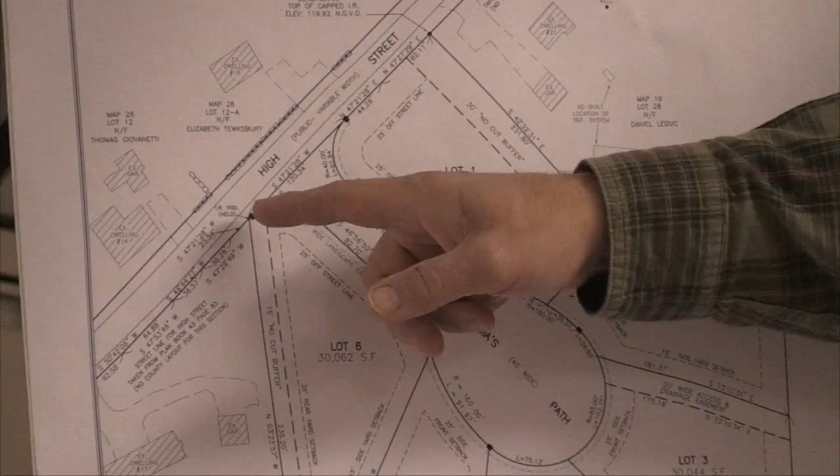So we reconfigured the lots. Basically what we did is we moved the corner of the intersection of the roadway. The intersection originally had ended at the intersection of the two lot lines to the abutter, so at the existing perimeter. We just shifted that over 2.73 feet as shown on the plan, and then slightly angled, shifted the road so that it was, again, as close to what was originally proposed. And everything else stayed the same as far as the lots.

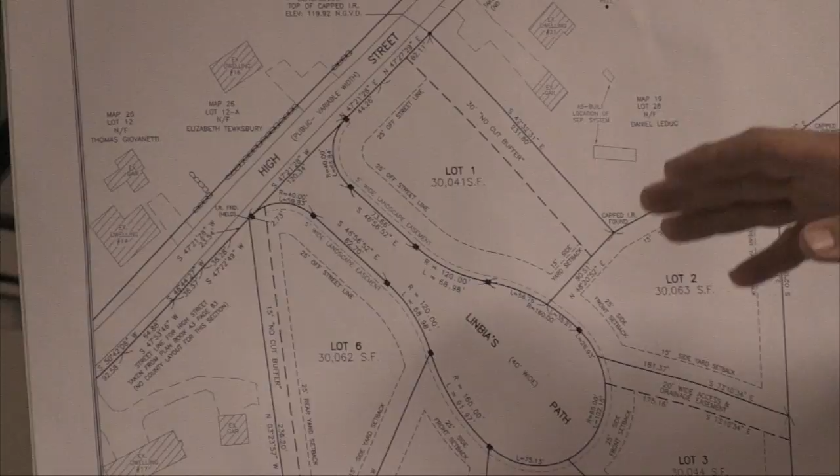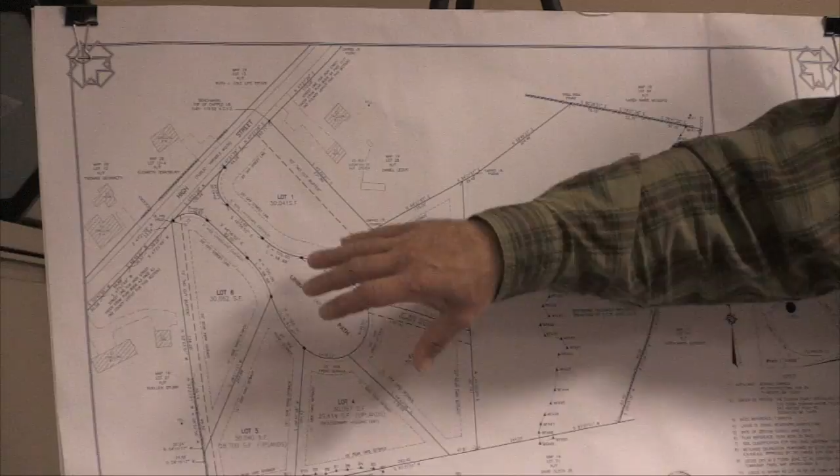The lots are changed slightly. Some of the interior lines separating the lots had shifted a little bit. They're all 30,000 square feet. We didn't change anything on the open space. We kept the line that was originally shown as separating the developed portion of the subdivision and the open space the same. So we just basically reshifted some of the interior lot lines so that we can make sure that we had the 30,000 square feet, which is required in a conservation subdivision.

So after we had our original meeting with the board to discuss the changes, we went down and staked out where the realignment, the edge of the pavement was. He's actually gone and put his base coat down. We located again, just to be on the safe side, where the catch basins and drain manholes and outlet structures and things like that fell, just to make sure that everything was still the same, and everything seems to be fitting now within this new layout of the road.

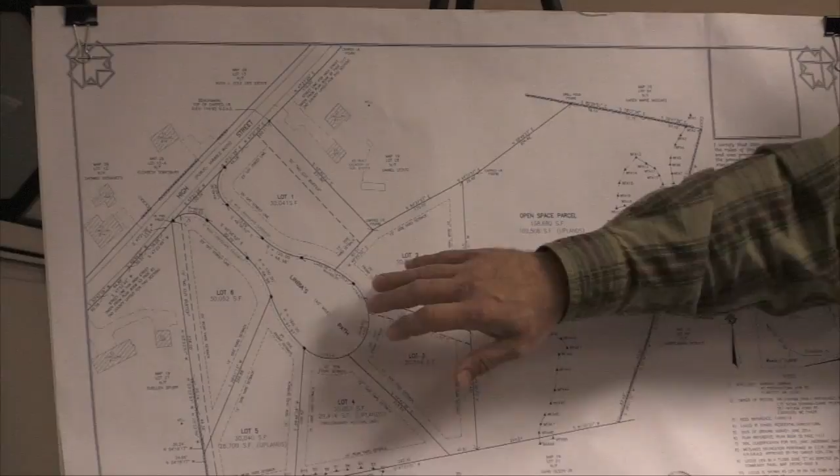So we haven't added any lots. We haven't really changed much of the area of the lots. It's pretty much the same, just a few things shifted to make it easier for him. Any questions by any of the board members?

I know before we had talked about that road, that originally when you come out, it was going to face a house. Does this affect that at all? Like the headlights, they're not going to go right. It shifted, actually, the angle of it shifted this way. It was the house that was directly across, which was more perpendicular with High Street. So it actually shifts a little bit westerly on the alignment. So it's not any closer to the house than it was before as far as the vision?

It shouldn't be. If it is, it's just so slightly; nothing really had changed that much. The centerline stakes that were out there, you really can't even notice the difference. What would have been the big problem if we had left it and not done anything, it would have been when they had come and installed the sidewalk. That's when we would have noticed that the sidewalk was outside of the layout around the cul-de-sac.

It probably would have been okay down in this area, but as soon as they started to make around this bend, that sidewalk would have been on the lots and not within the layout, so everything kind of got shifted so that wouldn't be a problem in the future. Okay, thank you. Anybody else have any questions?

Of course, my question is, the shift took place heading towards Kingston, not back up the other way, right? Exactly. Which way would that be? It would be heading north, northeast. Okay, so the shift is northeast, not towards an abutter? No. Right. It actually favors the abutter 2.73 feet. Right.

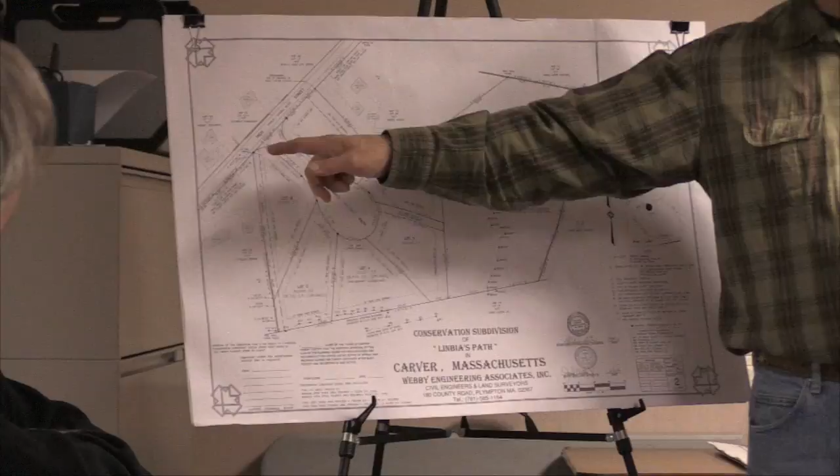To address his concerns, we had gone out and flagged the limit of clearing, and there was a flag at his lot corner, as he stated. The tree cutter did start in that location, figuring that was the limit of clearing, instead of where we had marked it 15 feet beyond, which is what he's referring to as a buffer zone. They did go into this area and I think cut down a couple trees, but somebody called our office and we went out there immediately and assessed where it was.

We reflagged the line for the tree cutter. It did look like there was some cutting that went within this 15-foot buffer at the top, but it didn't go much beyond maybe 50 feet from the intersection of High Street. It was mostly up in this area.

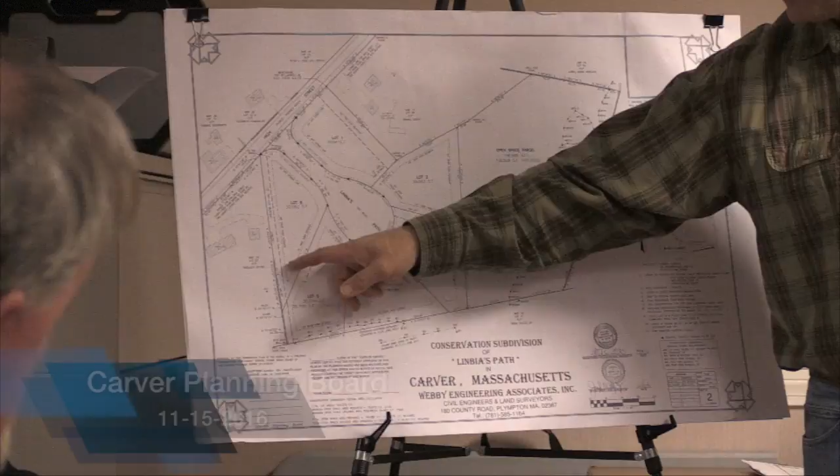The remainder of the line is kind of defined by an old stone wall, and then there were some stakes along the line, I think, that they had put in, and it didn't, to me, appear that they had cut anything that kind of served as screening between his property and where the construction was, except for this area, like I said.

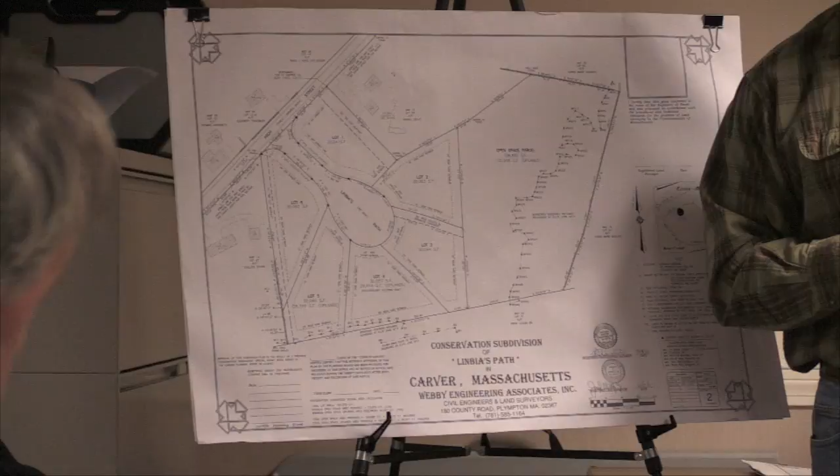So once it was brought to their attention, they stopped. There are some trees that they actually had intended to cut. They were marked, but they haven't cut those. They're going to leave those as they are. But he is right that they did get a little carried away up in this area here.

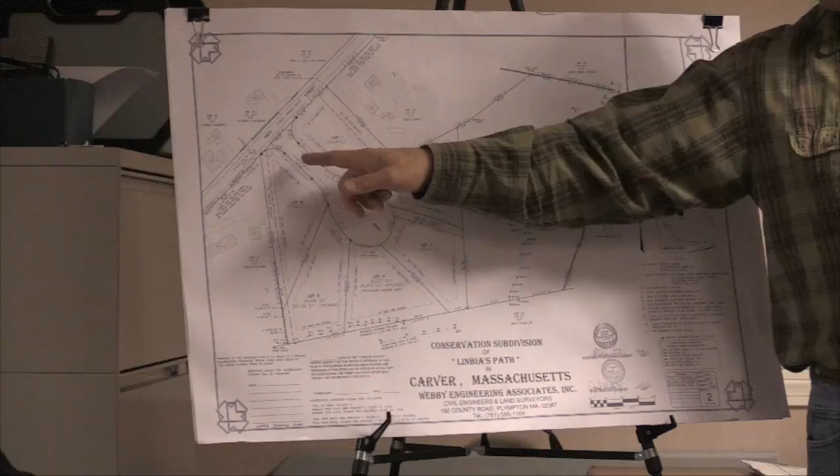As far as the grading of the road, we always knew that there would be that low spot that had to be elevated. As you came down the road, and this was something we came before the board to discuss, changing the profile, the layout of the road, we adjusted it so that it met more with the natural grade. We did have to fill in this low spot, but we always knew that had to come up,

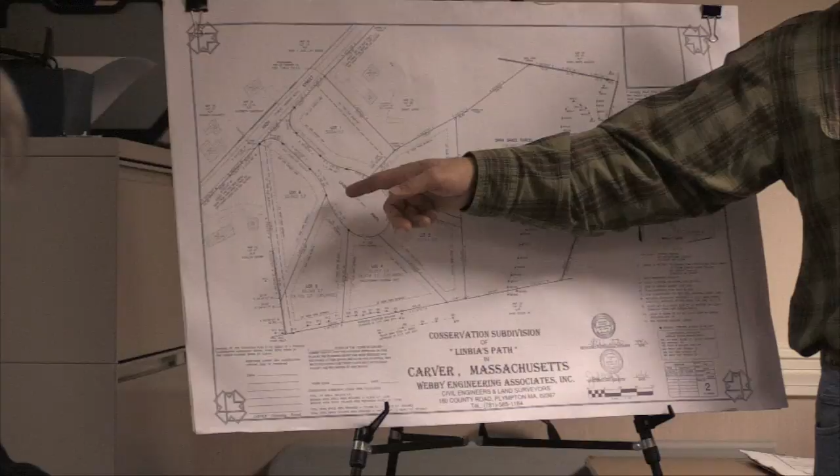and I don't know about 4 feet, but it's probably 3 or 4 feet, which, again, once they removed the top 2 feet of loam, which is typical, you can't construct a road on the existing grade. They had to remove a couple of feet, so it probably looks like it's more fill compared to the original grade. But the remainder of it matches pretty close to what the existing grade is when you come from here to here, and on this side here, it is in this area.

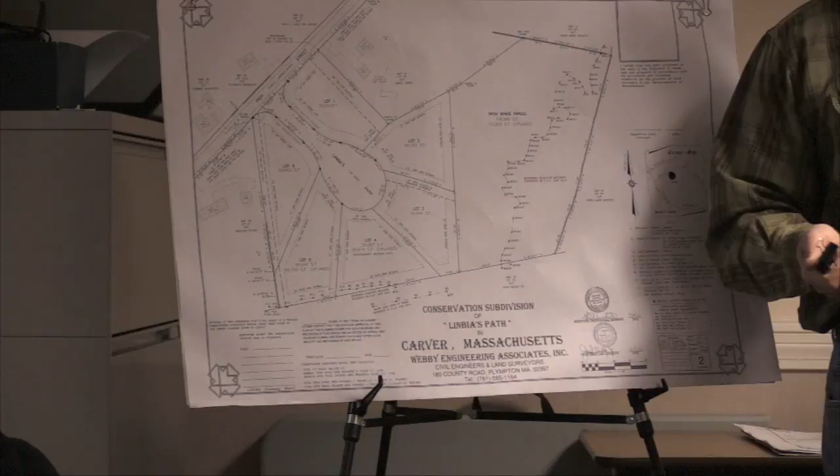But I've been out there after it's rained, and to me it doesn't look like there's any water that's coming off of the site, especially within the roadway. We get concerned about that, and every time we're working on a new development, when it rains, we go out there and check it out to see how things are working. And I shouldn't say I'm surprised, but I was surprised that, this is not for his concern, but any of the runoff within the cul-de-sac itself and the bioretention, everything is working very nicely within the catch basin area.

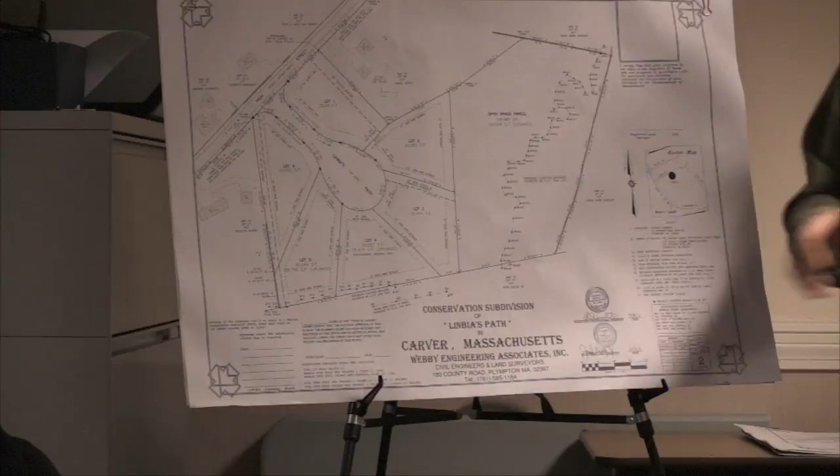As far as the neighboring properties, some of the grading that's happened in here is preparation for when they're going to start constructing some of the house lots. So he had some time to kind of prep the lots while he was waiting to go through this process. Again, he knew that there were some small hills that would have to get cut down, and that's basically what he's done.

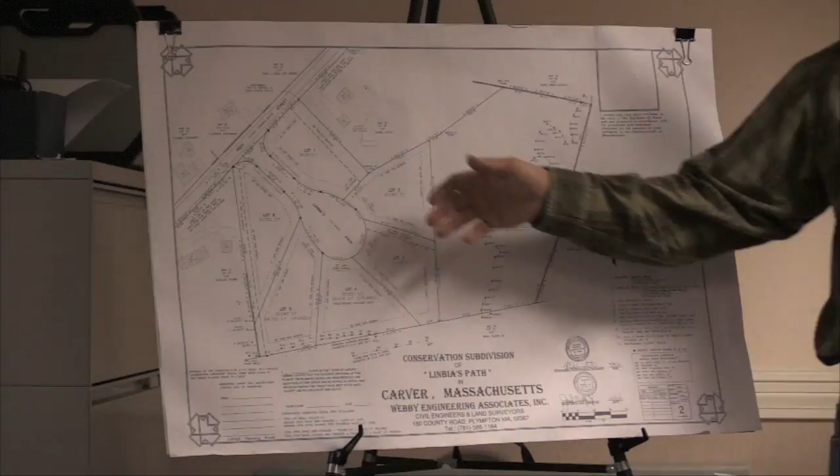But we've been out there on a few occasions and told him to remain as almost a natural berm along this property line. Last time I was out there, it seems to still maintain as a berm. So I don't have any concerns that there's water that's going to flow across this open area. None of the water is sheeting off of the roadway and then coming across this open area now.

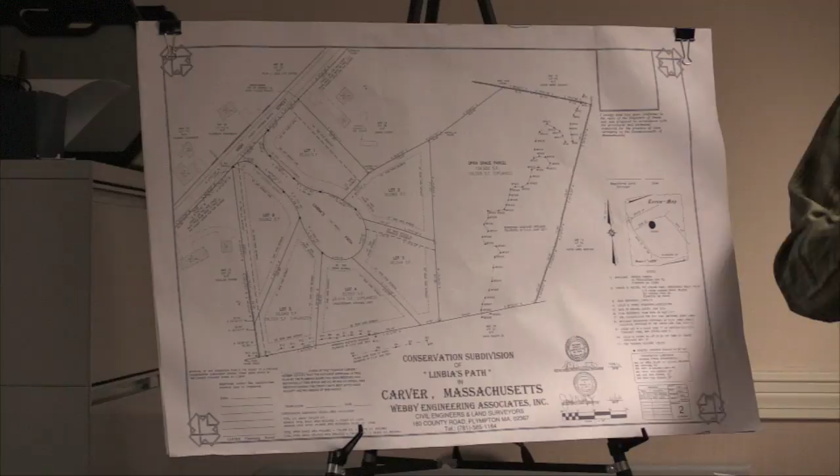And again, things are going to change, because once they construct the house here and the house here, these front yards are going to act as an additional berm. They're going to bring in some material and kind of slope everything towards the proposed roadway. So I know it looks different now because you're used to seeing it wooded in elevations. But it's definitely not done, and I don't think, now that the material has been stripped off the top, anything is flowing towards your property. Now, am I incorrect about that?

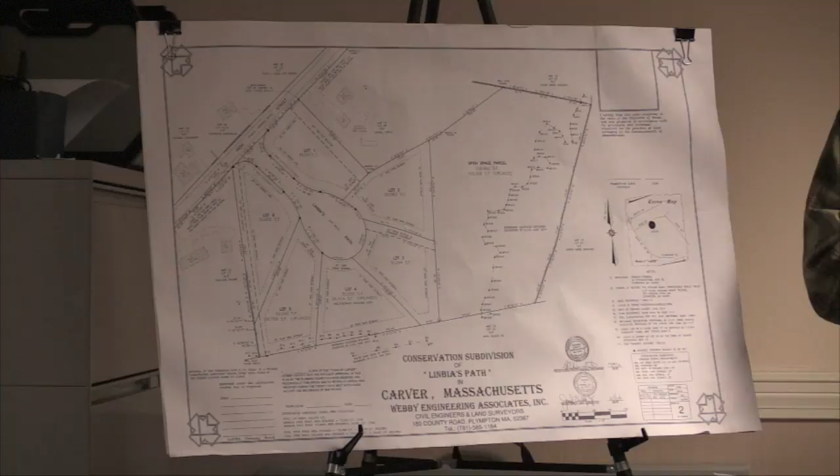No, I just had to ask again because I've noticed a lot of fill and a lot of stuff being brought in, and I know water runs off from higher points to lower points, and it seems like we are a low point next to that, which I brought up originally, which bothered me because I didn't want a river going through my backyard, because I never had a problem, even in the heaviest rains.

I never had an issue with anything rolling through the backyard out into the wetlands, which is lower at my property too, down at the end of my property. And we just worried that our little Eden there will be underwater at times, and we really love it there.

If the houses are placed where we have them proposed, we've got them kind of close to the street so that the people have decent backyards, then everything should grade away from your property into the roadway as was proposed. Okay. So that hasn't changed from the original plans. The grading's still the same. Okay. So everything should be, and that was what was approved at the beginning. So everything should be okay.

I just didn't know it was an issue, after knowing that my boundary marker was not known where it was, and I think the issue was the town has a metal pipe in the ground there doing their boundary off the road with a ribbon on it. In fact, I think they've just done it again. There's been some new ribbons put on a bunch of metal pipes headed towards my property. And I think originally they thought that might have been my marker, which was like 20 feet farther towards them than what it was.

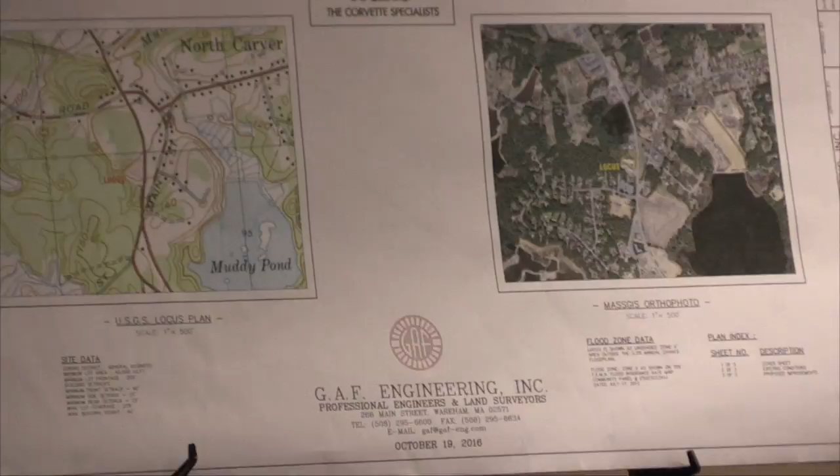Good evening. How you doing? Bill Madden from GAF Engineering here for Corvette Mike. Also with me is Mike Grande. He's Mike from Corvette Mike. I have some half sizes if you'd prefer to look at those as opposed to the large plan. Sure. I just brought them for convenience sake, if that's something that you'd like. I got one here. You got an extra? I'm good, I have mine.

Okay, essentially what we're doing is just repurposing the existing facility at 74 North Main Street. It was the previous pool business that is now out of business. And Corvette Mike has the property under agreement, and it's his intention to bring his business from Plymouth to Carver. It's right on Route 58. I think you're all familiar with the site.

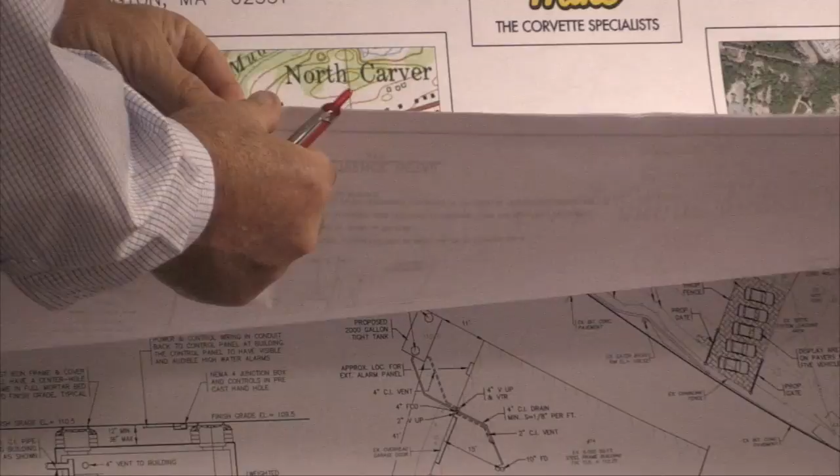The project's relatively straightforward. Really, it doesn't involve too much as far as site improvements go. The site is really perfect for what Mike intends to do here. The existing conditions plan that we prepared varies a little bit from the previous plan that was approved for the pool facility, and nothing of any great magnitude there. There's just some activities that took place, a couple of storage containers on the west side of the building.

There's a fuel tank, there's some air handling equipment here, and that's pretty much it. The pool display area was over here on this westerly side as well. And what we're looking to do is reuse some of that area. So effectively, there's no impervious area being added. There's no building expansion being proposed.

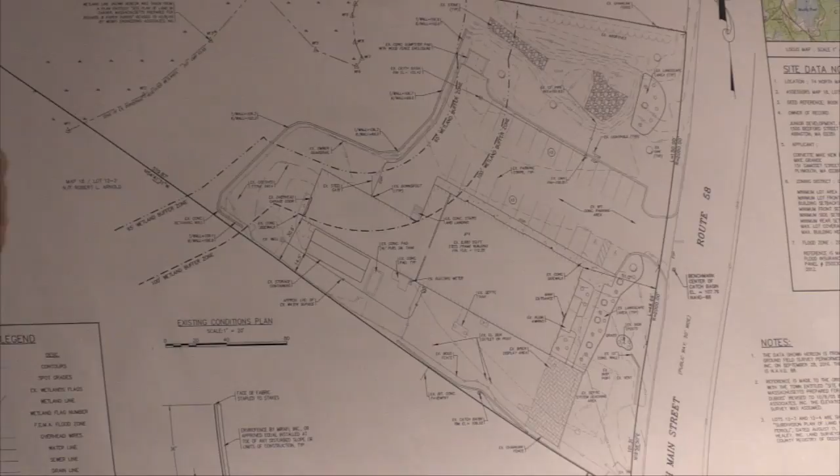There's nothing more than really utilizing the interior space for a showroom and a motor vehicle repair shop. The motor vehicle repair shop is really for the customers of the dealership, and it's by appointment only. It's not a drive-in, quick lube, oil change. It's very specific to by appointment only for the current customers, people that have purchased vehicles from Corvette Mike in the past. So that's really what's going on there.

So this plan here just essentially divides up the building. There's an existing wall on the inside of the building. I'm not certain what they originally considered the rear portion of the building. I think it might have been warehousing at one point and retail sales in the front part. So it was approximately 5,800 square feet of building in the front part. That would be the inside vehicle display area. There's approximately 3,100 feet in the rear. That would be the motor vehicle service area.

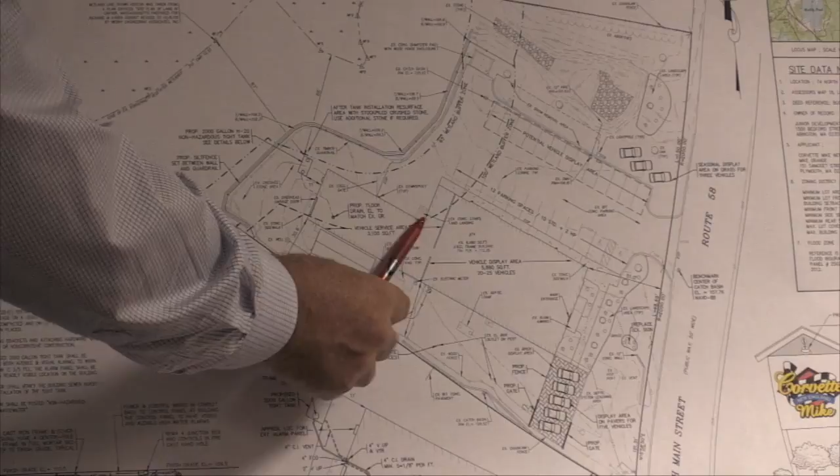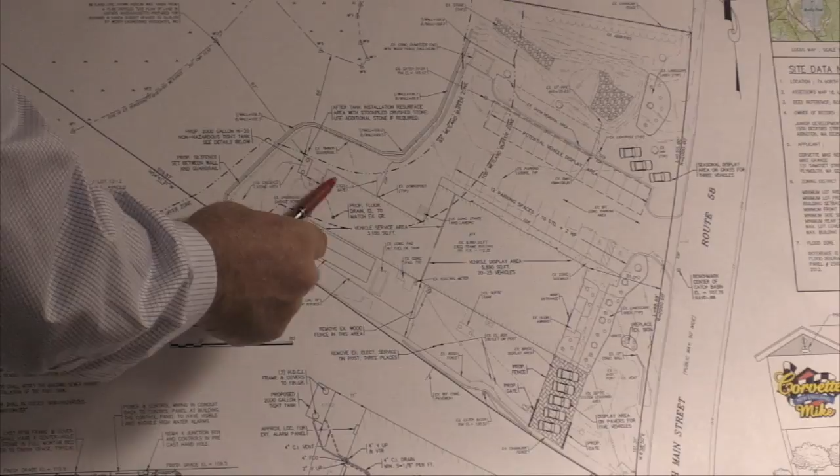There's an overhead garage door that on the original plans was indicated to be constructed and placed on this side of the building, but currently it's on the back side. So that works fairly well for the operation of the facility. The driveway and the curb cut on 58 is adequate for what we need for vehicular circulation on the site. And we can allow vehicles to come back here. There's a gate that exists here, paved parking down here, crushed stone up in this area, but it allows someone to come to the back to the service area to drop their vehicle off. You can drive it inside the building.

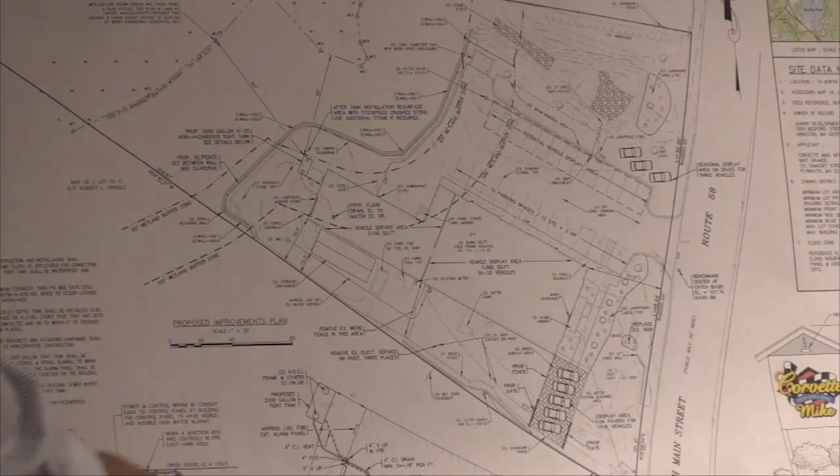One of the things that we recognized when we went to the site originally is that under today's plumbing code, any building with an overhead garage door requires a floor drain to be installed in it, in the event that a vehicle can find its way into a building. So in the absence of municipal sewerage, we have to place a non-hazardous waste holding tank in the back of the property. So we designed a small 10-inch floor drain in the front portion of the service bay, and then we indicate where we place our underground tank for the storage of any waste that finds its way into that floor drain. The details of the plumbing and the tank are shown on the plan.

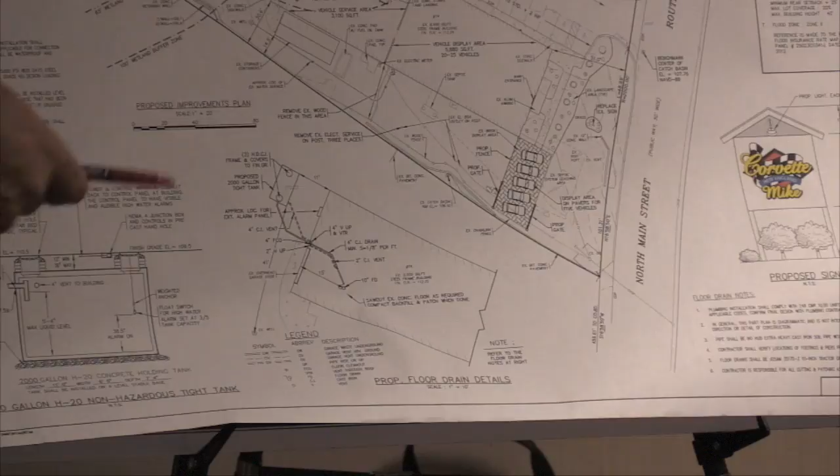This work does fall within the 100-foot buffer zone to the border of vegetated wetland that's out in the back, and we filed a request for determination with conservation. I had a discussion with Brooke, and she was fairly confident that that was the proper approach, given that we're separated from the wetland and the buffer zone by a stone retaining wall that's probably the better part of 4 feet high. There's really no opportunity for any adverse impact to the resource area or the buffer zone, just due to the nature of the site the way it's developed right now. So effectively, the only work going on the site is the installation of that holding tank, as it's required.

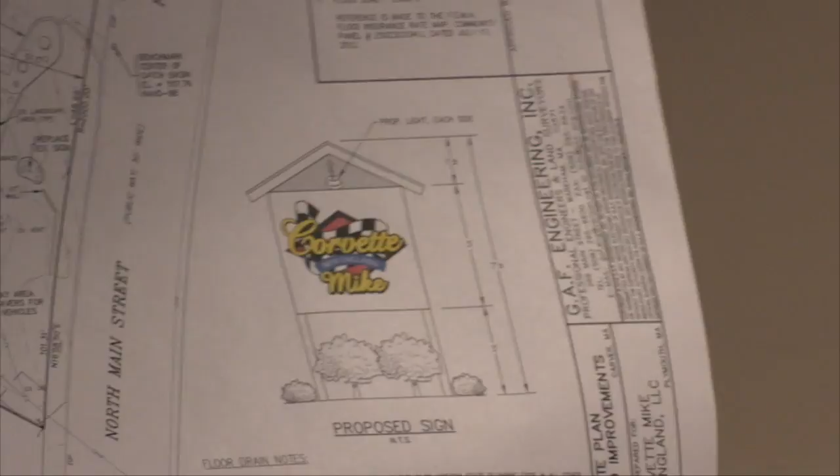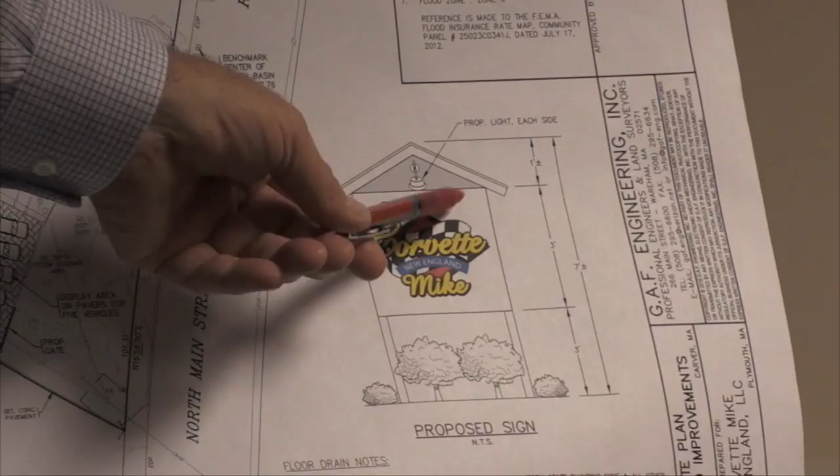We also show our project sign. There is an existing area centrally located to the front of the building where the sign was, and we've detailed a sign on the plan that's pretty close to the requirements by zoning. I think we're restricted in height to 10 feet. We're showing the sign height is a little over 7 feet. I think we're also required to have a sign of about 10 square feet in surface area on each of two sides. It's roughly a 3 by 3 area of sign, exactly the sign that's in the current facility, which we plan to duplicate at this facility.

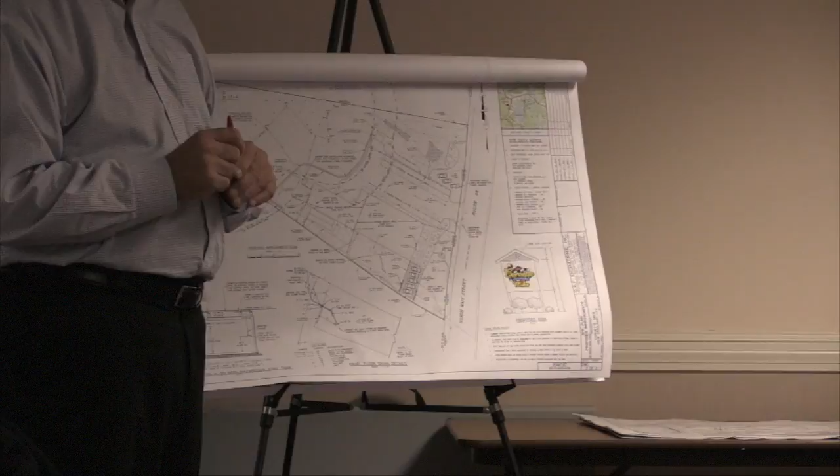So since we have a change of use from the retail type of sales of pool equipment to motor vehicle sales, we're required to come before you for a special permit and also for site plan review. So that's really what motivated us to come here. We'd like to come anyway, but we had to come by virtue of the zoning bylaw. So that brings us here tonight.

So essentially, we're looking at perhaps outdoor storage for 5 vehicles on the area that currently consists of brick pavers. And that's where they had a pool set up there once before. It's fenced in. We thought that we could take advantage of the fencing. We also show some gates on the fenced area, predominantly for emergency access to the site. We propose to deliver a vehicle to those areas by actually driving it in through the back area, and get them between the gate and park those 5 there.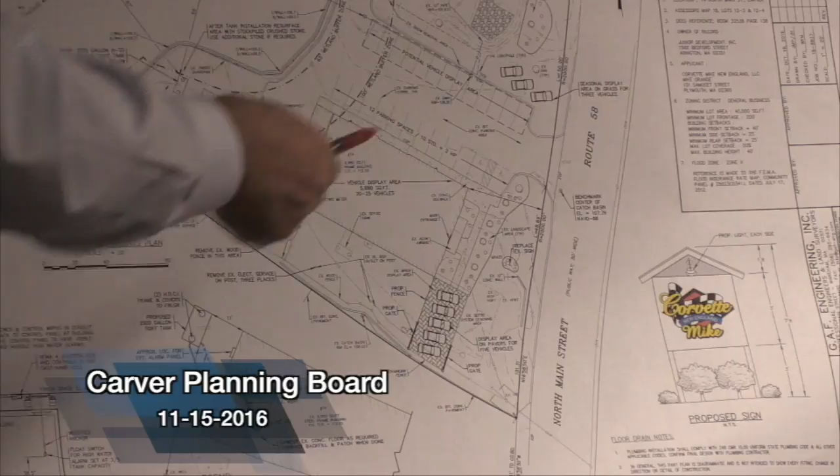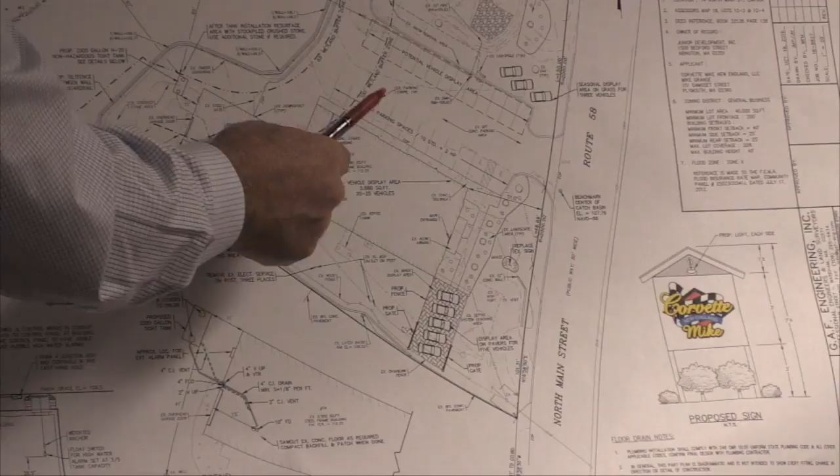Additional 3 spaces over to the easterly side of the site. And those would be seasonal outdoor storage spaces. We're not going to put a vehicle out there in the winter months, but certainly the summer months we'd be using those for display areas. We also indicate an area where about 13 existing parking spaces are, and I've just noted those as potential vehicle display areas in the event that there's quite a bit of inventory. You'd like to put some vehicles outside there, but the bulk of them, 20 to 25 or so, would be stored inside the building in that 5,800 square foot front area.

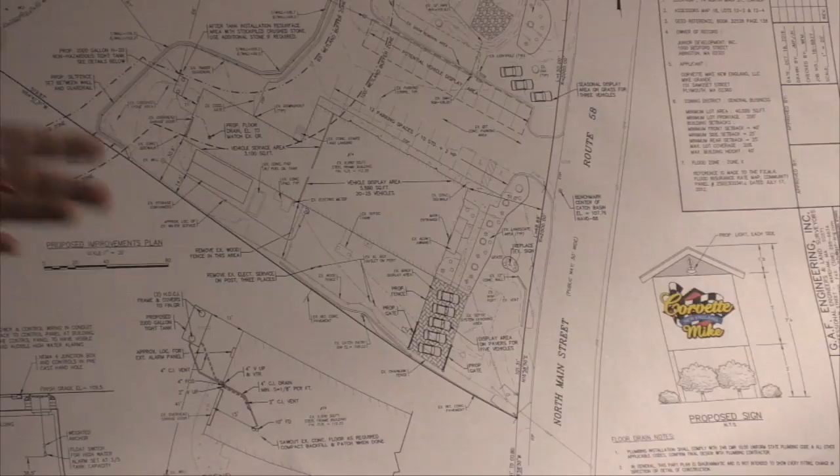So we think the site really functions perfectly for what they want to do over there. If you've been to the place in Plymouth, it's really a fraction of the size of this facility. And if you see how well organized that place is, how neat and clean it is, I think that we can mirror the same activities occurring over here as time goes on. So it just really fits well for Mike. So essentially it's a repurposing of this site for a different use. I think that it'll fit good with the community. It'll take a building that's being underutilized now, drive a little more tax base.

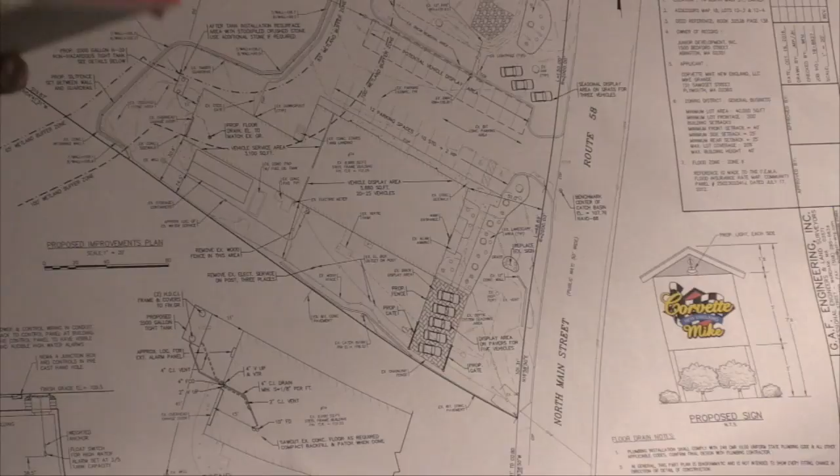He doesn't have a tremendous amount of employees that'll be working there. There's probably 3 or 4 sales and 1 serviceman that'll handle the by appointment only repairs. So we're kind of modest with the number of employees that we have there. And I think it's a relatively low impact type of business. I think it's a good location for it and should work out very well in the town. And that's pretty much what I have on the project. Thank you. Do you have any comments, Marlene, about this?

I actually don't have very many. There's no site work, no grading, no change in impervious surface, no change to the drainage design, so no engineering review. I do have a note from the conservation agent that the tight tank that was referred to is scheduled on their November 30th agenda, so that's moving forward. The parking's adequate, the curb cut is existing, no proposed changes to that, so traffic and circulation is no big deal. It's all going to be the same. And you move a lot of your cars in at night too, anyways, right? Oh, yeah.

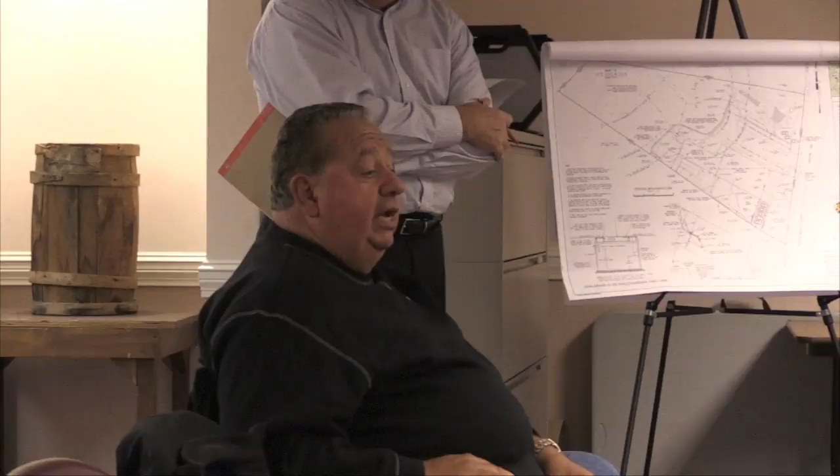And the dumpster's still there. That's the original dumpster. There's a fenced-in area there. The snow area is the same as it was before. Correct. I guess the conservation probably asked us too. You're going to have oil, or what kind of chemicals do you store, whether it be inside or outside? The intention is to put a waste oil heater in the shop. So that'll take up all of our waste oil. And the other chemicals that we have to get rid of, we will get rid of either with Safety-Kleen or Clean Harbors, and have that done on a regular basis. And those are all stored inside the buildings.

Correct. Okay. Nothing outside. And that's what this tight tank is for, in case oil or something got spilled on the floor, and then it would go into the drain. It's more to do with snow and ice on a vehicle driven in for service in the winter. Oh, okay. Really, you don't want to get into a routine pumping of that. It's just very expensive to deal with. So I think the plan that they currently use for individual stains or small amounts of spillage that you might have on the floor: speedy dry, containerize it, put your rags in the container, similar to what you do at a marina or any other automotive place, and just store those small containerized waste containers and have them taken care of by Clean Harbors or a hazardous waste handler.

Anybody on the board have any additional questions? I just have one question for them. Does the fire department have to take a look at it because of the change of use? The fire department has received copies of the plans, and they're familiar with the building and everything, so they're okay with it. Good. Yeah, we have a letter that we submitted for the record from our fire protection consultant indicating how it complies with current code status now.

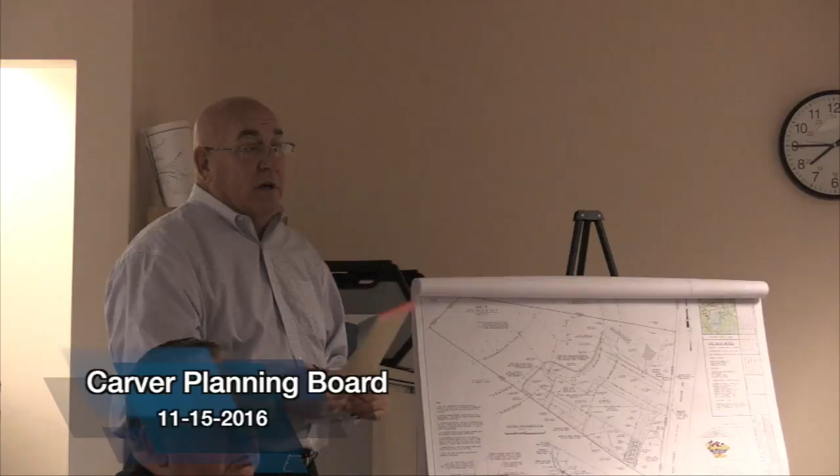I think we're waiting to see if there were any other comments during the comment period that we would have to respond to. But we're a little proactive on that. It's a big money item if we had to do something down there. So we felt that it was appropriate to deal with it early on in the project and come up with a code position on it, which is what we have done, and submitted that as part of the administrative file.

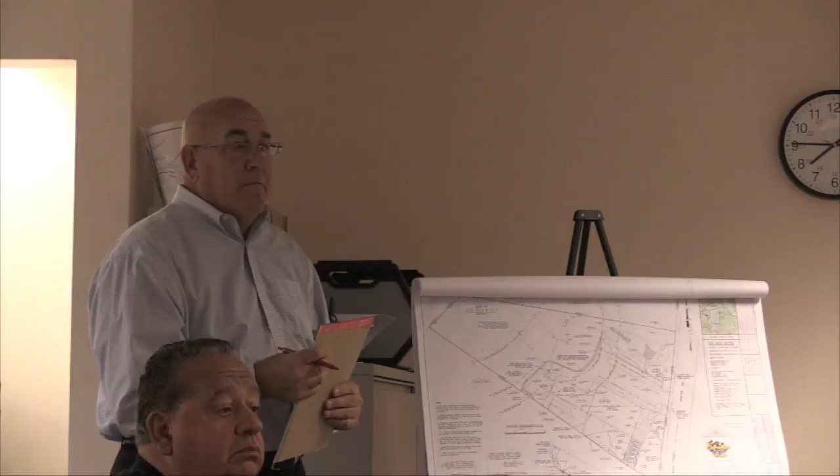For myself, I think it's a great use of space. I can't believe you'd want to leave Plymouth to come to Carver, but the location of Route 58 and 44 is ideal. It's the space that you're looking for, huh? The space, yeah. Great. And our business isn't a drive-by where you pull in and say, I want to buy that car. 90% of our business starts online. And we sell cars all over the country.

Well, I'm sure my grandson and I will be down there often looking. We make dreams come true. Maybe me more than him.

I just had a quick question on the 3 vehicles up in the most northern part. So that's going to go on the grass? And how far off the road do they have to be? So the dealership will also need a license from the Board of Selectmen, and they usually get into those details. Under zoning, those are not considered structures, so they don't need to maintain a setback, but that'll be something the selectmen will regulate for the dealership license.

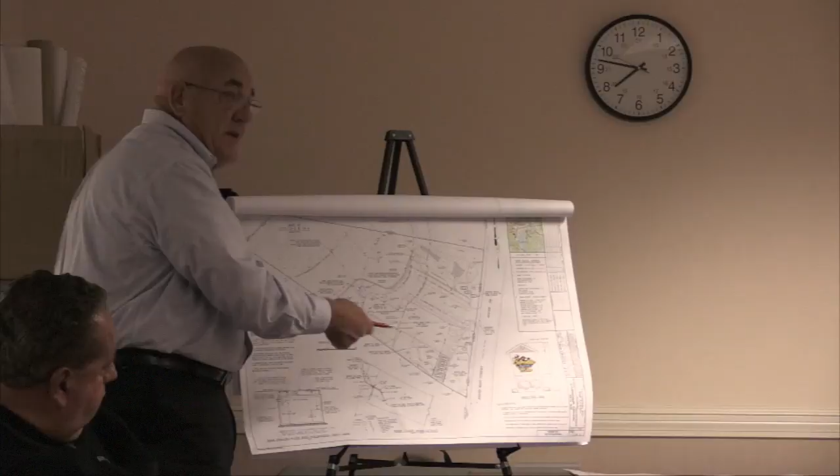And the potential vehicle display, those are the existing parking spots on the far side of the lot, right? Correct. We think it's pretty apparent that the 12 spaces we have up there are going to be adequate for the use. Okay, that looks great. And the last thing I would suggest is make that sign as big as you possibly can under the guidelines, so that you don't have to go to the trouble to come back. Make it as big as you can, off the bat. It's pretty much maxed out.

While we're talking about the sign, when I was reviewing the regulations there was a standard of 10 square feet, 10 foot high. But isn't there an opportunity under the special permit to place a larger sign? You can apply for a separate special permit for internally lit or for dimensional relief. But the sign as designed now meets your bylaw without a special permit. It's indicative of the sign at the site in Plymouth now. We added a little eyebrow over the top to demonstrate how we propose to light it. Gooseneck lighting? Yes.

I think that'll work well. What are the proposed hours of operation? This time of year, 9 to 6. In the summer, 9 to 7. Friday and Saturday, 9 to 5, and closed on Sundays.

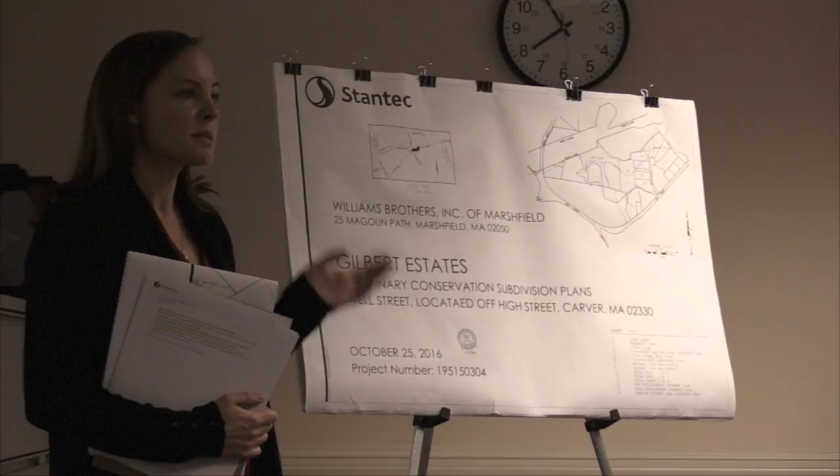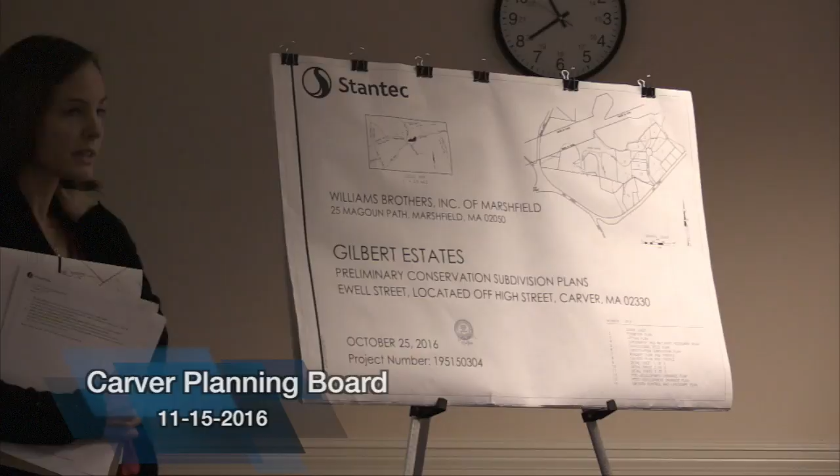So this is the preliminary subdivision submittal for a 10-lot conservation plan that we had submitted back in 2005 to the Planning Board and the Conservation Commission. And the whole project got put on hold then over some sand rights. It went to court over sand rights. Since then, all the legal issues have been resolved and now we're back. So our preliminary submittal included this 14-sheet set. It has a 10-lot conventional yield plan and a 9-lot conventional yield plan and a 10-lot conservation.

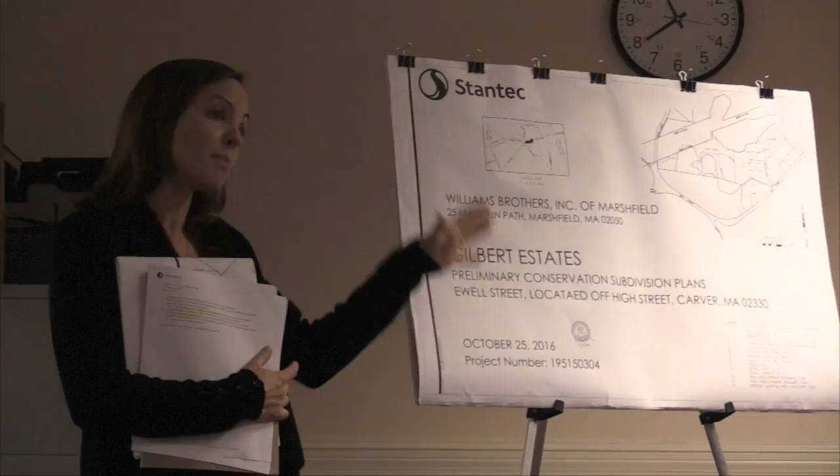This already exists, right? No. This isn't the one that already exists? Everything was put on hold. It was just preliminary back in 2005 and then put on hold, so now we're back again. So we submitted these plans, stormwater report, and stormwater calculations. We also had filed with the Conservation Commission at the same time. That is on for November 30th, the next for conservation.

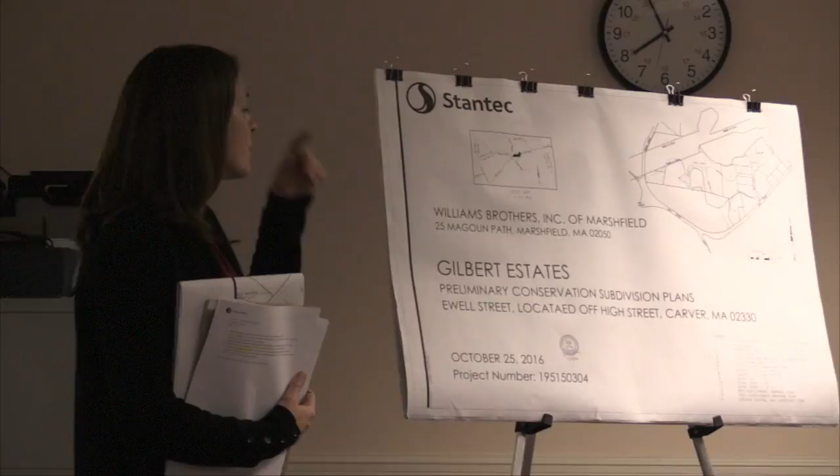It's a 26-acre parcel. This is High Street here, Route 44 cut through the rear of the lot, leaving access to the site off of High Street here. It's 26 acres. We're proposing a conservation subdivision on 15 acres. These 10 lots here that we're proposing.

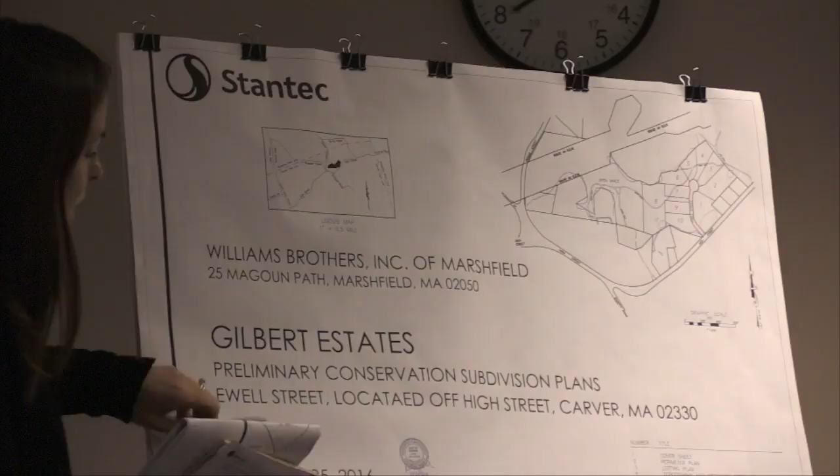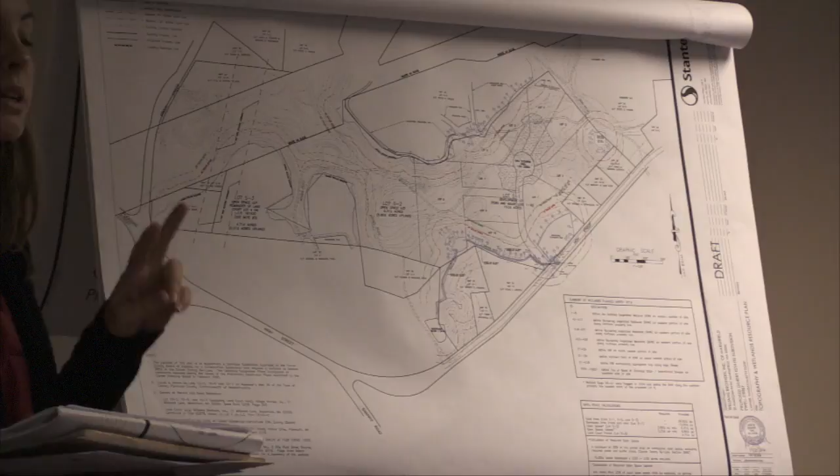Let's flip to the existing conditions real quick. All undeveloped land. There's bogs, abandoned. Most of the bogs here have been abandoned. Now, you probably have the 3-page letter that I submitted with these plans here. Just going to run through these quickly. It outlines the utilities, the proposed utilities, and the 2 waivers we're requesting.

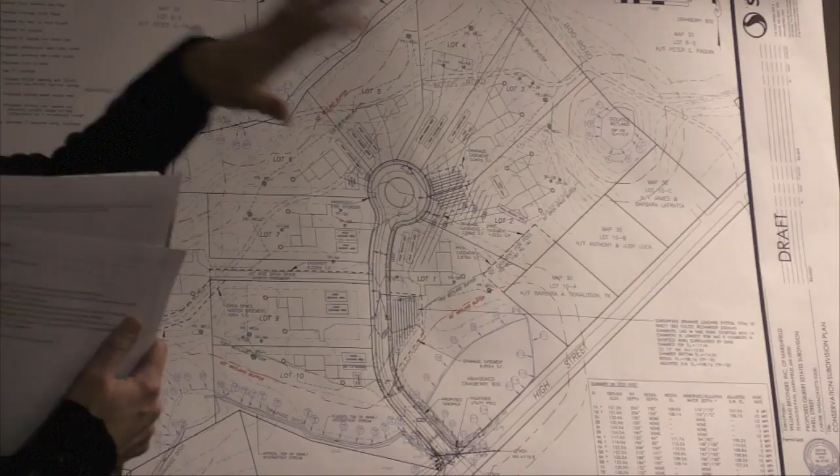We're proposing, when we jump to the conservation, the conservation plan shows 10. So each lot can be served by a private septic and private drinking water well. There were test pits done back in 2005. Lot lines and the layout of the lots where the septic, the well, and the house go have changed. So some of these septic systems don't align with the test pits. So as design continues, we understand that we'll have to do more test pits. We anticipate sandy soils, fast perc rates.

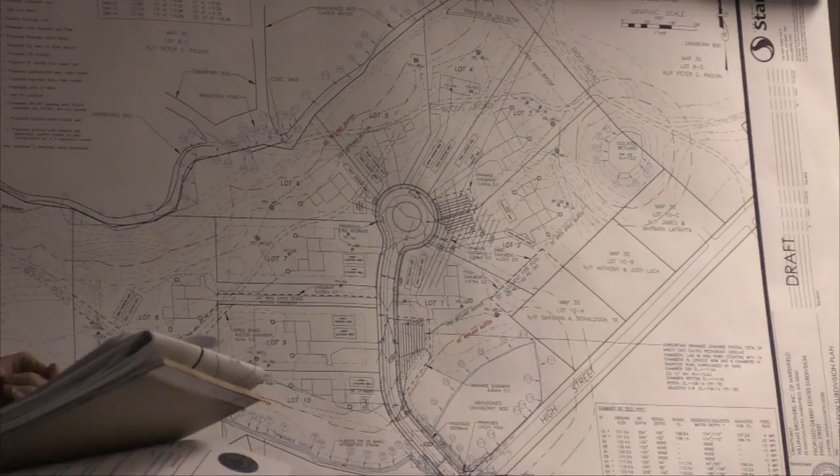We are proposing a water main, a dry water main, and 2 hydrants in case the town has future plans to expand their water system. The electric, cable, and telephone wires are overhead on High Street. We're proposing 1 utility pole. The rest of these utilities will be underground there. All the homes will have their own private heating system, oil or propane, because there's no natural gas in High Street.

The stormwater system includes catch basins, deep sump catch basins, and 2 subsurface leaching systems. It's a 600-foot road here. 1 leaching system here and 1 subsurface leaching system here.

The 2 waivers that will be needed for this conservation subdivision. One is the right-of-way right here, the radius of the right-of-way. The town requires a 40-foot minimum, and due to the limited access for this property, there's this property line right here, and we have an abandoned bog, wetland. We're proposing a 25-foot

radius of this right-of-way. The town requires a 30-foot minimum radius of the edge of pavement. We're meeting that 30-foot radius for the edge of pavement. It's just we're requesting a waiver for the right-of-way so that we can get this road in here. This is determined as the best point of access here with the least impacts to the wetlands.

There's the second waiver. I forget which section, there's a section of the rules and regs that has to do with this culvert here. There's an existing 15-inch culvert. We're proposing to extend that so that we can build the road. This is an intermittent stream that's been man-made, dug, that feeds water into the bogs over on this property. So back in 2005, we had gone to Army Corps and Conservation. They approved a design of an extension of this culvert before in the work to build this road.

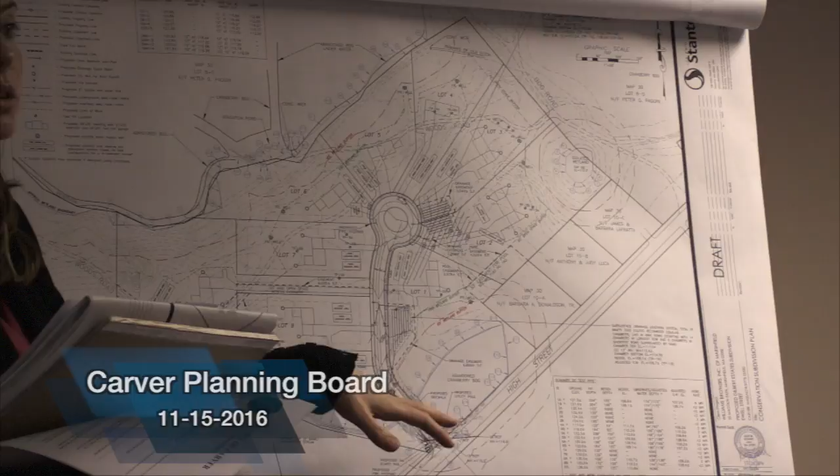The town subdivision rules and regs require additional drainage calculations and head wall design, and we're requesting a waiver to not do any more additional drainage calculations for this intermittent stream. We have done the drainage calculations for the entire subdivision, pre and post conditions, and that has been submitted. So that just was through the letter that went along with these plans.

Was it last Thursday, Marlene reviewed the plans and submitted a memo. You guys probably have that in your packet. Based on her view of the subdivision rules and regs, I'm going back to the conventional yield. The way she views the rules and regs, lot 7, the rear lot here in the conventional, she feels is not valid for the conventional yield.

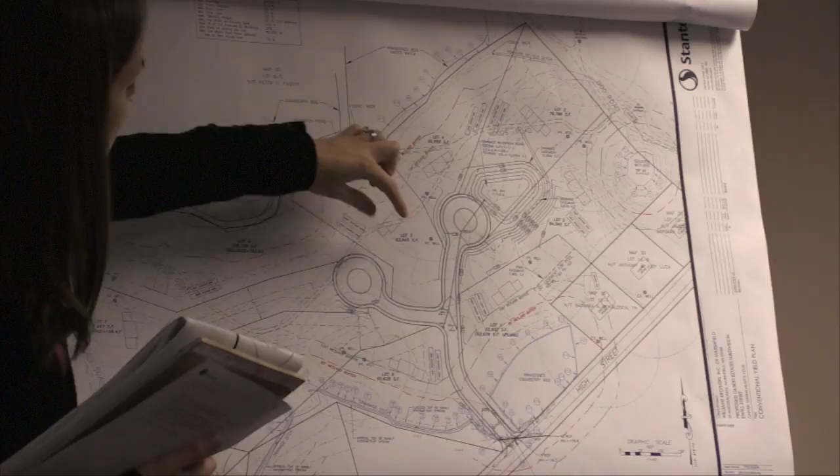So today we revised this conventional yield plan to show the same number of lots, but no rear lot. So here are 9 lots that meet the rules and regs, the dimensional requirements. The roadway is the same, the grading is the same on the roadway, the stormwater system is the same. I eliminated the rear lot by revising the lot lines of lots 5, 6, 7, 8, and 9.

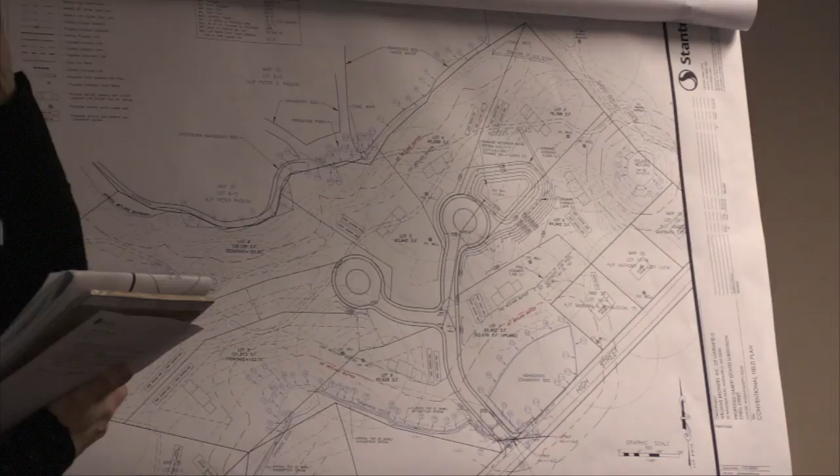All these lots have a minimum of 60,000 square feet, minimum frontage of 150, meet the minimum front, rear, and side yard setbacks. The lot width at the building line is 120 feet, the minimum upland is met, and the minimum lot width from the front setback line to the rear house line meets the 75-foot minimum. So this is the 9-lot conventional yield, where all 9 lots meet the dimensional requirements, no rear lot, thereby allowing the 10-lot conservation subdivision, which includes that 1 inclusionary lot, bonus lot.

I just submitted that today to Marlene, and I'm sorry, I should have given this to you earlier today. That's okay. That was the 3 full-size plans I promised you.

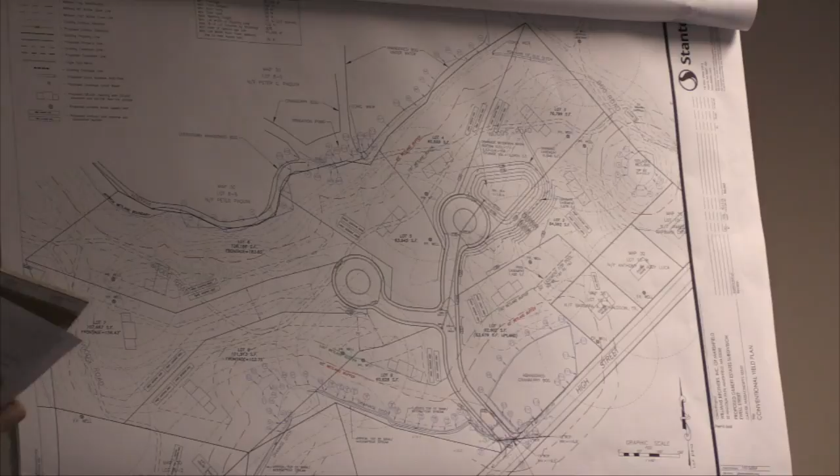So you haven't had time to review this? Not yet, no. This plan was just sent today. So what are our responsibilities as far as looking at this? Are we here to make suggestions or to approve or disapprove of things? A preliminary plan is guidance from the board when they move forward into designing their definitive plan. You can't record a preliminary plan, you can't appeal it, it's guidance.

You do have some time. We can certainly talk about it again. I would like to review these revisions and get back to you on that. The whole point of a preliminary plan is that you work out some of the issues beforehand, so the definitive plan can go faster without doing everything at the definitive stage. I will take a look at these and get back to everyone with my comments on the redesign. If the rear lot has been removed and lot 7 can be accommodated under the zoning minimums, then that lot would not need to be dropped from the plan.

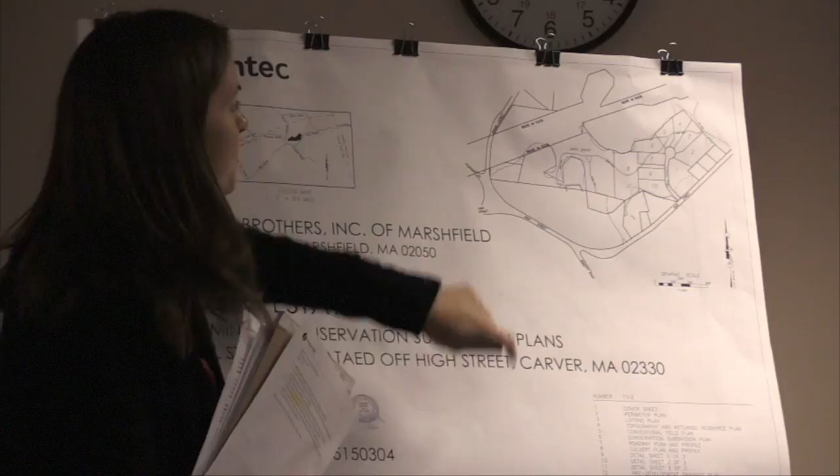How far down High Street is this? It's near Brook Street, the street just under the bridge of 44? Yeah, yep. Okay. So it's just before Brook Street? Just east of the Brook and the Route 44 intersection. Up there, right here, there's Pleasant, Brook, and High. Okay. Snap-it road down here. Okay, that helps. Just want to get an idea, when I drive down that road, what I'm looking at.

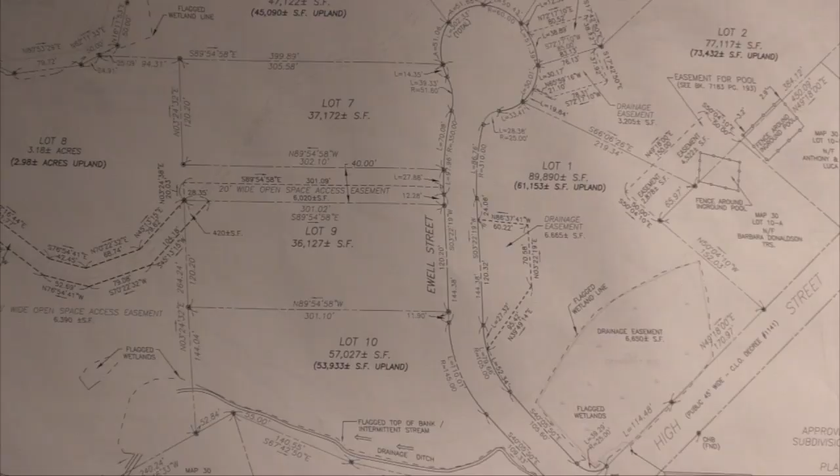What is lot 8? Is that just open? Which one are you looking at? I'm sorry. There'll be a separate access into that. No, this is a rear lot in the conservation subdivision. Okay. So not the conventional. Right, so the rear lots will be redesigned. My memo about the rear lots is, under your zoning code, you allow these as long as there's no division after May of 1998, I think. And since you're doing a division of a property now, I'm saying that rear lots are actually only allowed as ANR plans. They're not allowed as part of a definitive plan. So at the definitive special permit stage, a rear lot is not eligible for a definitive plan.

So your plans are showing those rear lots with the 40-foot frontage. And your conservation subdivision special permit requires all lots to have at least 50 feet of minimum frontage. So that is something that can be redesigned in the future. So there's nothing proposed to be built on this then? Well, that plan is showing 10 lots. And yes, that plan is proposing that Lot 8 be a house lot. Oh, it's just the access right here? Yes. But it's my opinion that at the next stage, that'll have to be redesigned as part of the special permit definitive filing to meet your minimum standards under zoning for a lot to be done as part of a subdivision. Okay.

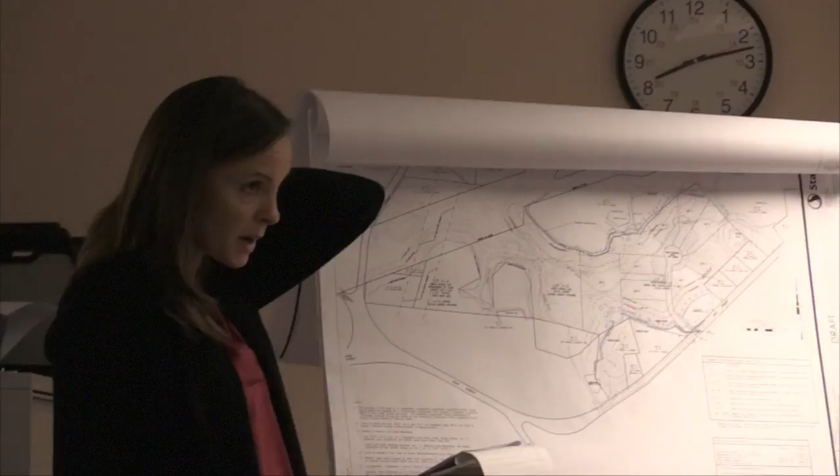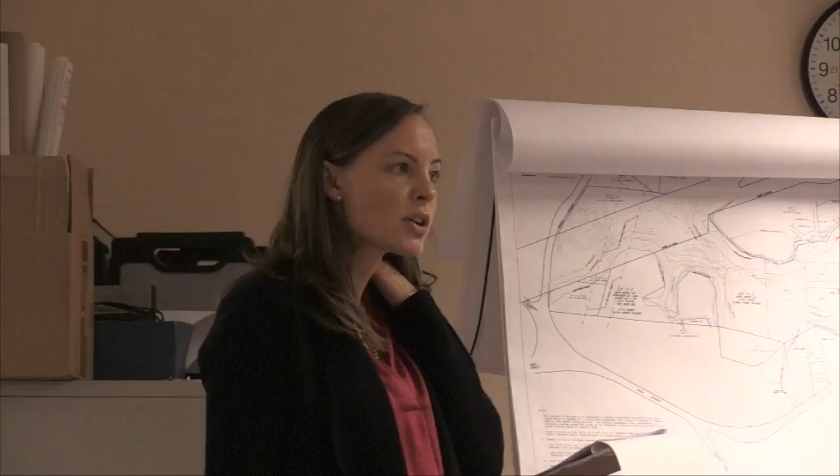I did want to mention that we received the Fuss and O'Neill comments as well, the peer review on these preliminary plans. Most of it had to do with stormwater and erosion. The first one, probably their biggest, was prior to a subsurface leaching system, the Mass DEP requires 44% removal of total suspended solids, TSS. So we'll need another pre-treatment device prior to the subsurface leaching systems, and we will incorporate one of the approved pre-treatment devices, whether it be a Stormceptor or some other device.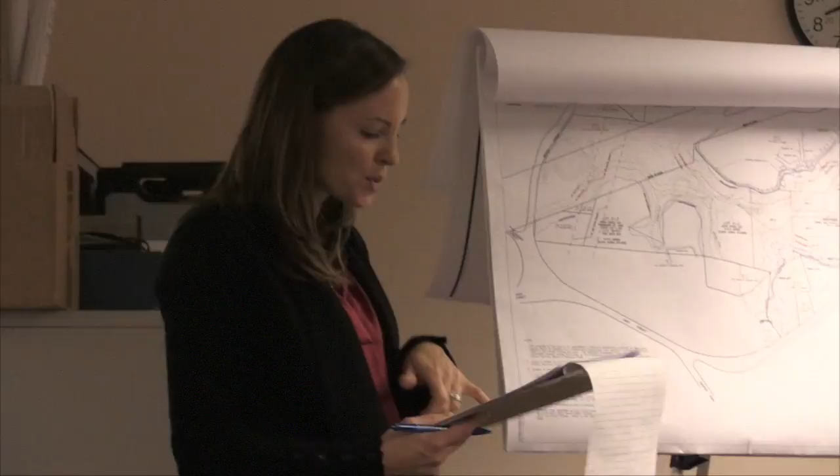Fuss and O'Neill also mentioned they didn't receive one of the appendices of the HydroCAD. It was one file, so it was in there. I checked. And then they asked for the SWPPP, O&M, and stormwater reports. They did receive the O&M and stormwater. The SWPPP is not prepared yet. That will be prepared later, prior to any construction.

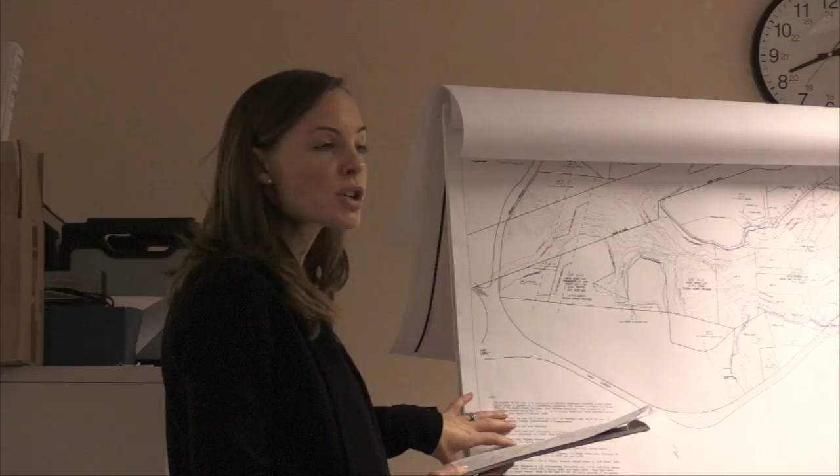Then they have some comments regarding the site plans. All these issues will definitely be addressed in the definitive subdivision plans. They want the limit of clearing shown on more of the plans, rather than just the erosion control plan that showed the limit of clearing. The construction entrance, more details, and consistency on the erosion control. We mentioned the compost filter tubes, and on another plan we called out silt fence but had a detail for the tubes. So that will be consistent in the definitive.

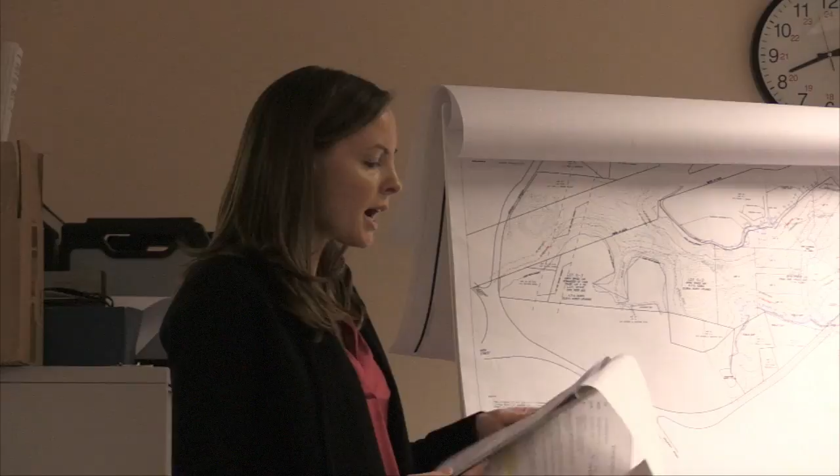During construction, they want to make sure the catch basins are protected with silt sack inlet protection systems. Some more details on the water quality swales. They want construction sequence. So a lot of these, I'm sure, will be covered during the conservation hearing, and these will be addressed for sure during the next revision of the plans.

So we should schedule this for the next meeting? Yeah, I think so. When you review the plans, you can send back any final comments you have, and everything can be incorporated for the definitive filing. Okay. So the next meeting is the 29th. And you don't have to continue it or anything, it's not a hearing. Do we have to vote on it? Nope. Okay, so we can just move this off to the 29th. So we'll see you the 29th. Great. Thank you for your time.

All right, we do have a sign permit for Dunkin' Donuts at 300 Tremont Street. I think they told me they were not able to make it tonight, but if you needed any changes, they would make them and send it back to you for the next meeting. But it's pretty much their standard sign package, and it does meet all of your dimensional requirements in the bylaw.